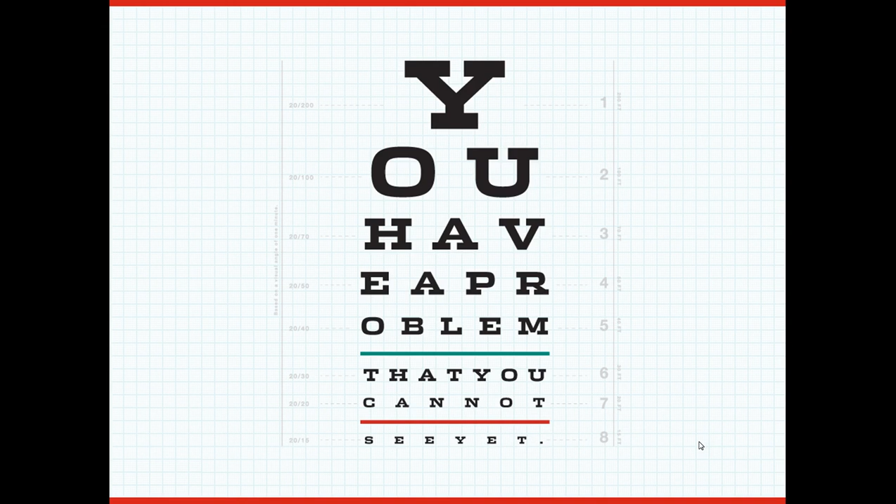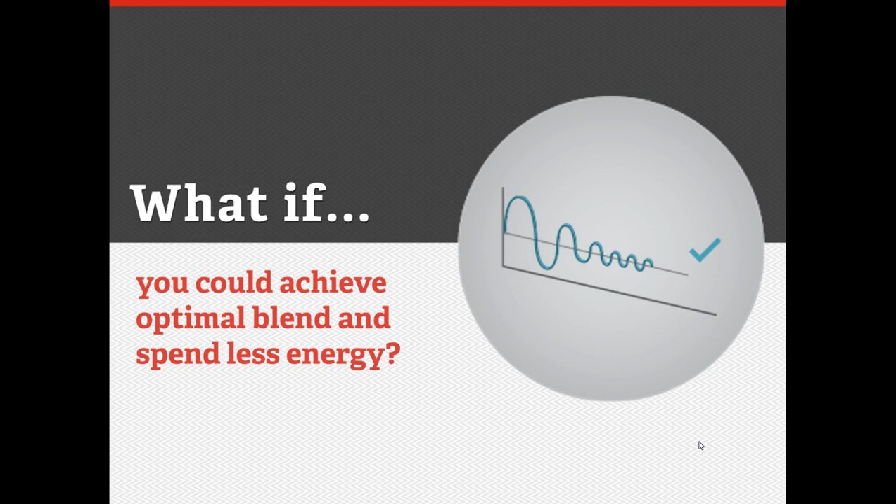Hi, I'm here today to talk to you about a problem you may not even know you have. Let me start by asking you a few questions. What if you could make more saleable paper? What if your machines ran more efficiently and lasted longer? What if you could achieve an optimal blend and spend less energy?

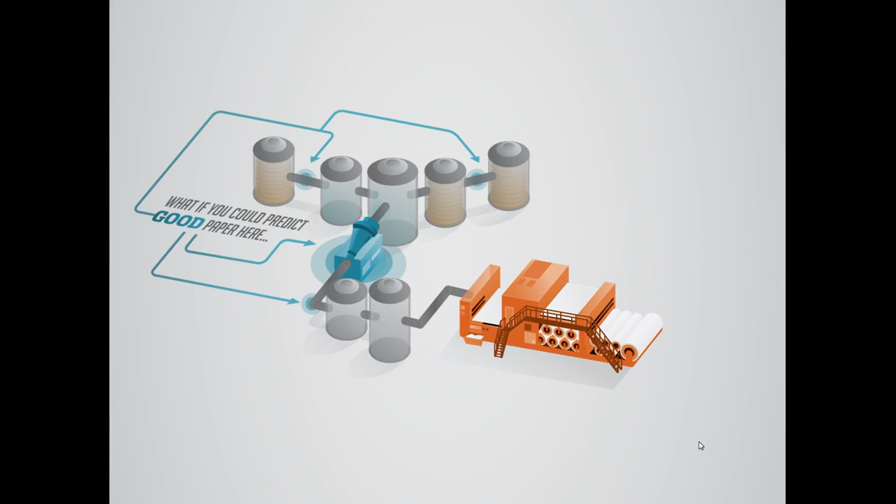Let me put this a little bit more simply. What if you could predict good paper here instead of making bad paper here? Well, with the TECO Drainac, you can. The Drainac is the only Freeness analyzer available today that will help you visualize, understand, and execute without wasted time or wasted money. Sounds pretty good, right?

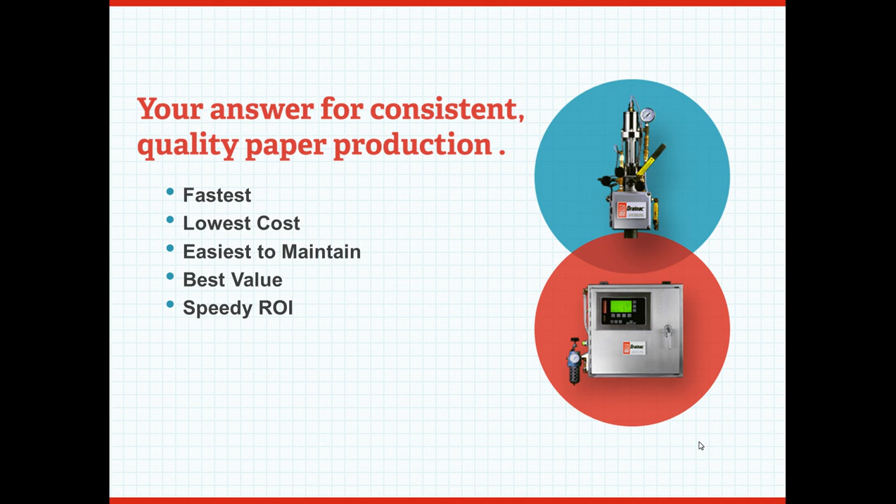The Drainac is the answer to your pain. It's the fastest, lowest cost, and most pain-free device of its kind available in the world today, and frankly, it's awesome. With this simple, low-cost instrument, you will revolutionize your process and realize a return on your investment so quickly, you'll wonder why you didn't make this decision years ago.

So, what's your freeness? Do you know? More importantly, do you know what impact variable freeness has on your process each and every day? Put another way, do you know how much variable freeness is actually costing you? We asked some of our customers what their life was like before measuring freeness with Drainac, and this is what they had to say.

It's a lot like driving down the freeway without a speedometer. Would you try that? If you're making something out of spec, you're inherently wasting energy. I'm sure that you can relate to that. We operate on a simple principle. If you can see something, you can manage it. That's the visualize, understand, and execute we started with earlier.

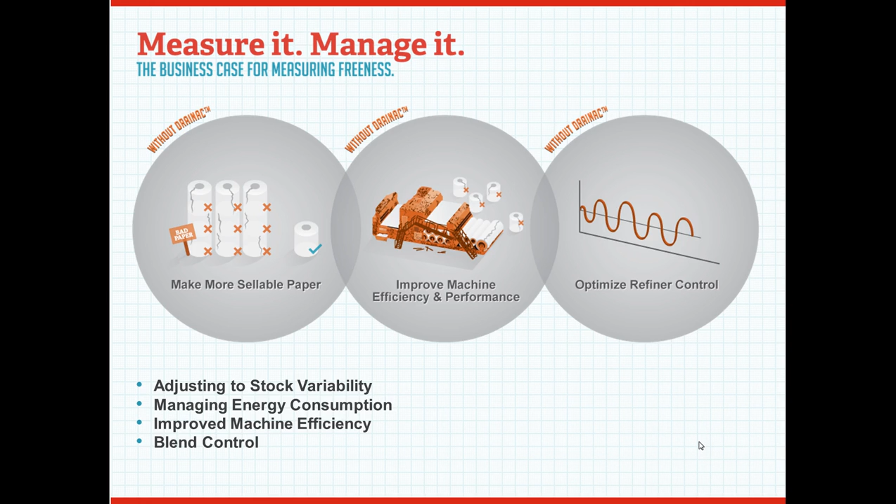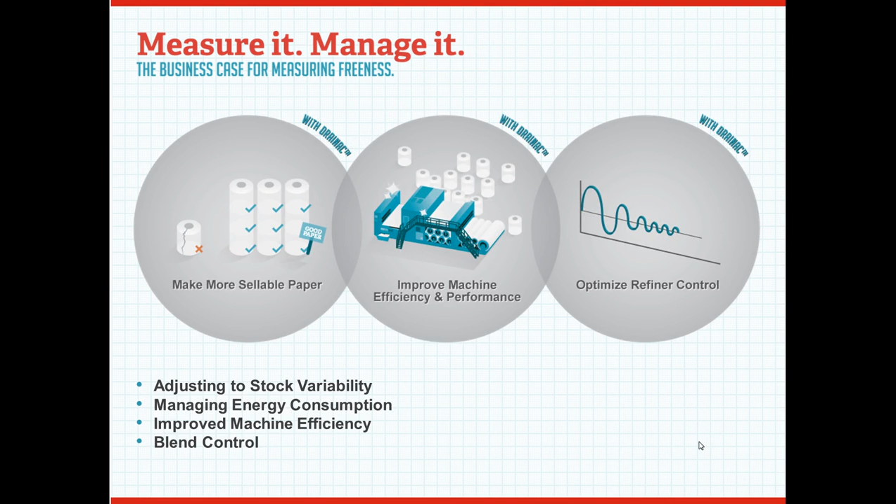The Drainac will help you make more saleable paper, improve machine efficiency and performance, and help you optimize the energy you're putting into your stock. So, I'd like you to ask yourself this question. What impact would measuring freeness have on your operation?

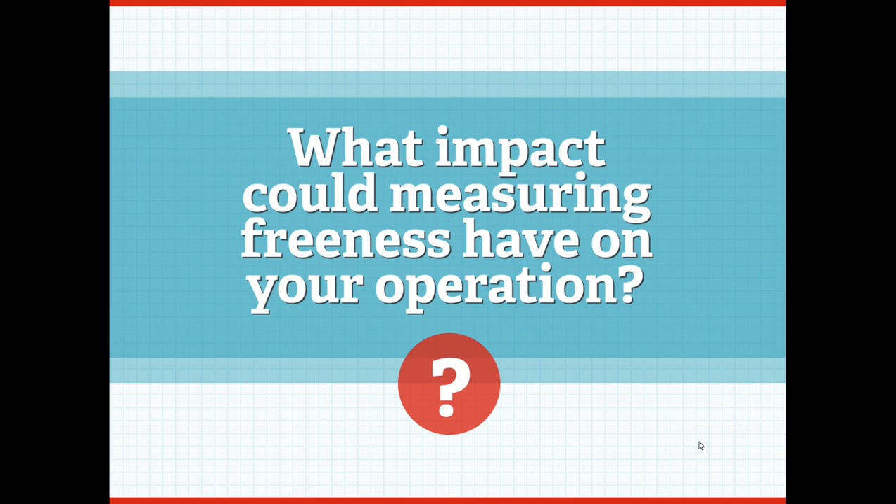Okay, so now you've heard the pitch, let's talk about the details. Drainac has many applications in facilities like yours. For example, some people use it to monitor freeness and perhaps close the loop on refiner control. Others use it for enhancing machine runnability and managing pulp blends. The facilities required for Drainac are pretty straightforward.

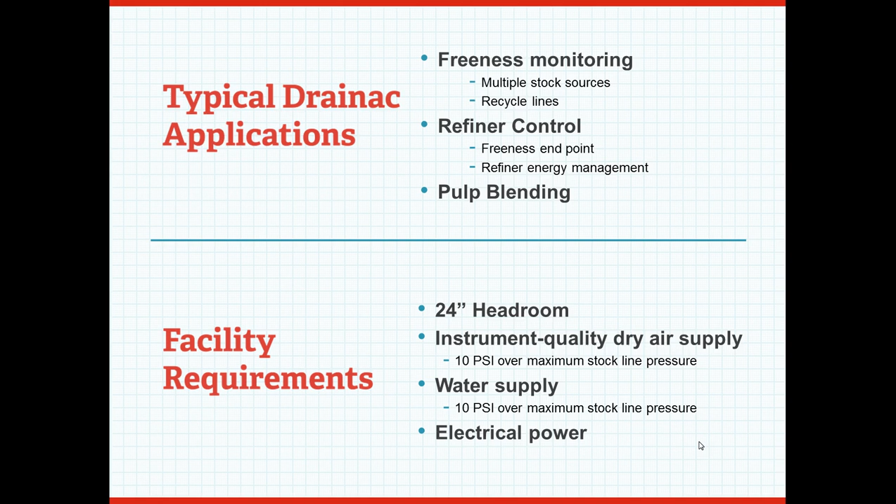You need a couple of feet of headroom for servicing the instrument. You also need a source of instrument quality dry air with a minimum pressure of at least 10 psi above maximum stock line pressure at all times. You'll need a source of filtered water, again at 10 psi above maximum stock line pressure. And of course you'll need a source of power. So let's take a closer look at the Drainac system.

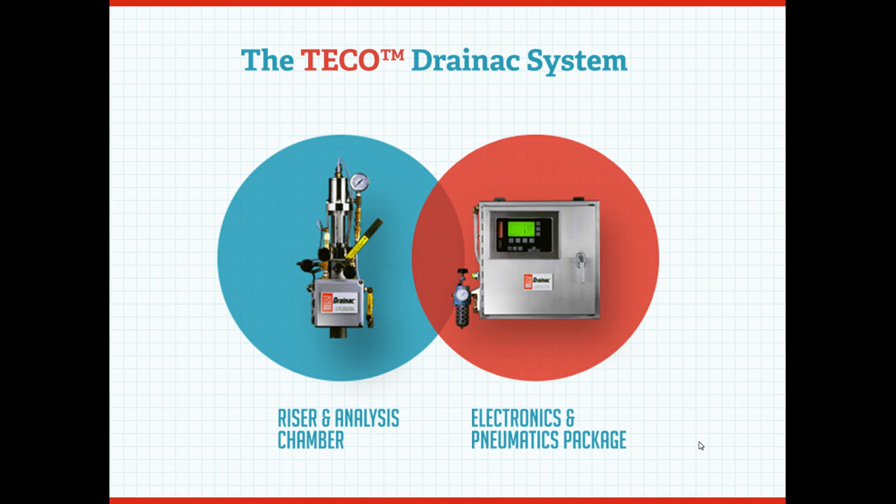There are two components to a Drainac, the analysis riser and the electronics enclosure. This is the analysis riser. It's the component that samples your stock and performs the freeness analyses. It's available in a variety of different configurations depending on your application. Typically, the riser is welded into a stock line, but it can also be mounted on an open chest or weir or on the side of a hydropulper.

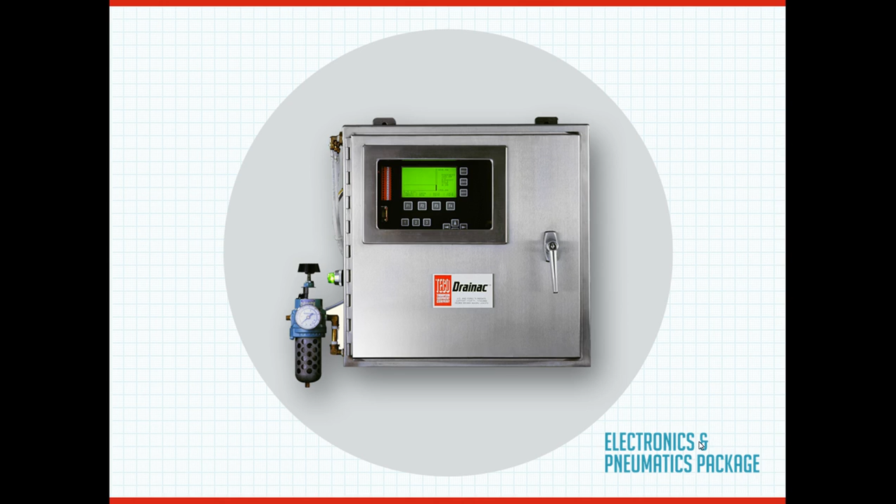This is the Drainac control enclosure. It houses the various electronics and pneumatic packages. So, how does this system work?

Unlike other analyzers, Drainac doesn't try to automate the TAPPI T227 CSF methodology. Instead, we use a proprietary technique that allows us to complete an analysis in as little as 12 seconds. We start by creating a pressure differential in the analysis chamber, which forces stock up into the riser. That stock hits a screen, which forms a fiber pad, and then only filtrate enters the analysis chamber. We measure the amount of time it takes that filtrate to fill a specific volume.

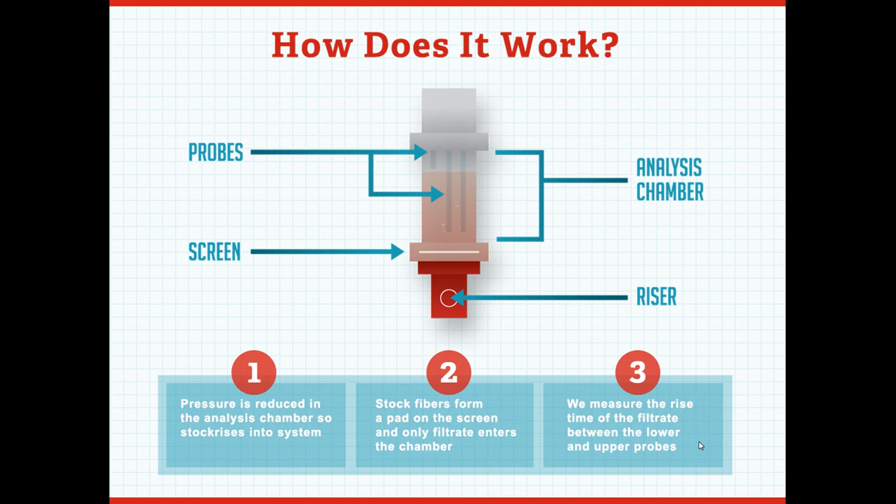It's a simple process, and this is what one customer had to say about the Drainac. With the Drainac, you're seeing the actual freeness while the paper is being built, and it helps you act in a more proactive, not reactive mode. This simple technology allows us to make quick decisions about refiner changes, better controlling the end product.

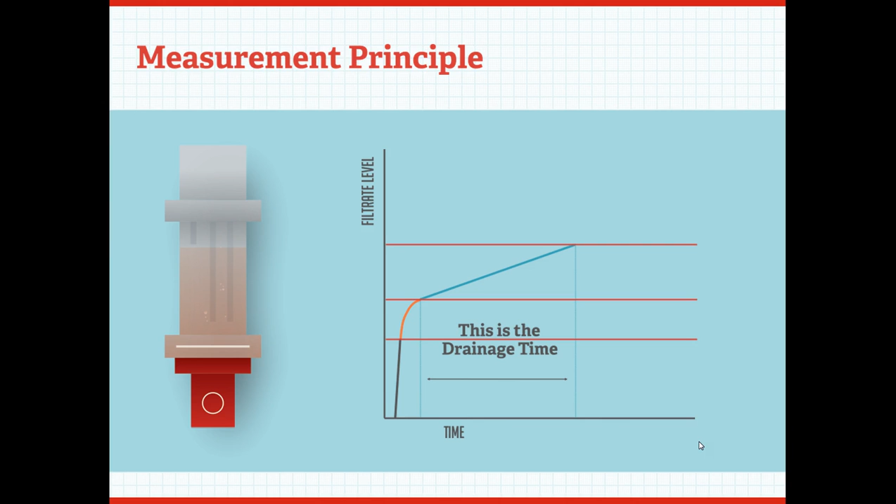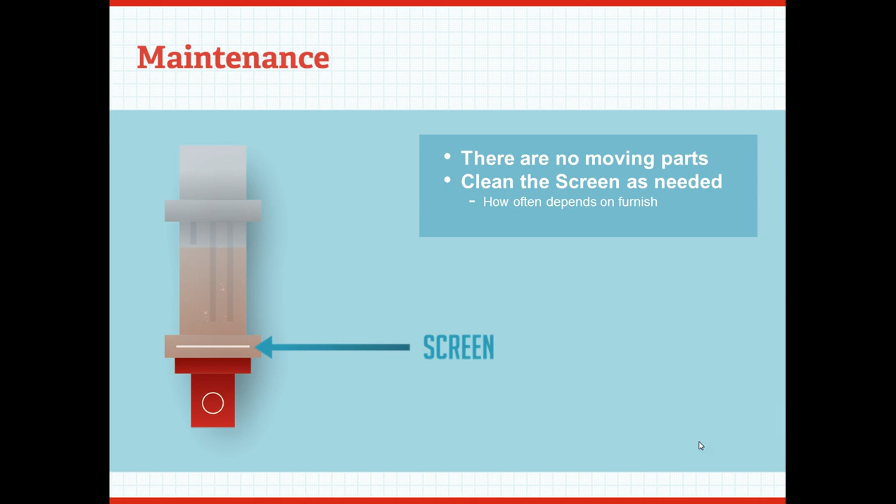The next question most people have is, what does it take to keep this instrument going? Well, let's talk about maintenance. Unlike our competitors, there are no moving parts to the Drainac, so it's very easy to maintain. First, you'll need to keep it clean, which mostly means keeping the main screen and the analysis probes clean and free of debris. How often you'll need to do this will depend on your stock, but most customers typically clean their systems 2 to 3 times a week. We've posted videos on YouTube which illustrate how to do this.

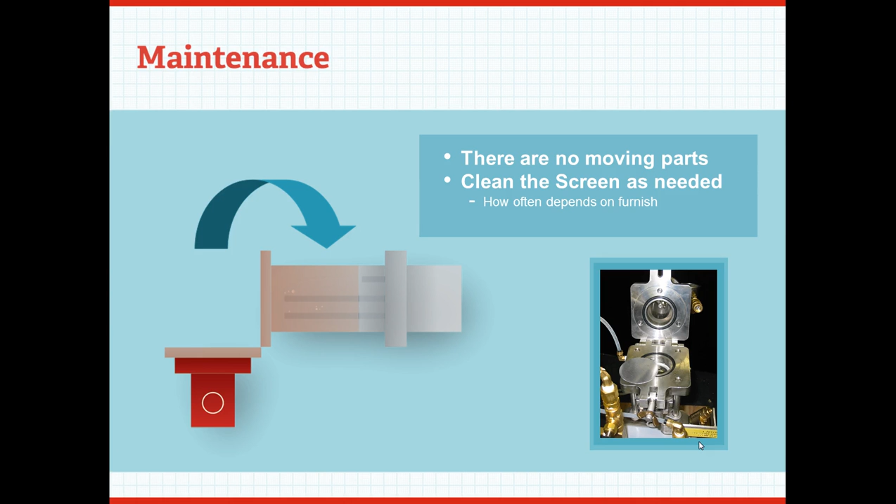About once a year, you'll need to replace certain consumables in the system. We've put together a recommended annual service spare parts kit and a service schedule, which makes this pretty straightforward. Your E&I staff will be able to do this without any special training required.

Now, the Drainac isn't the only way to measure freeness out there, but it frankly blows the alternatives out of the water. There's lab testing, but as you already know, that's slow and highly variable. You've got TAPPI T227 robots, but they're also slow, and they're very expensive. And because they're robots, they're complicated, and that means that they're expensive to maintain. Of course, you could skip testing altogether, but that's not good. If you can't see it, you can't control it. Drainac is the only device that will allow you to visualize, understand, and execute without wasted money or wasted time.

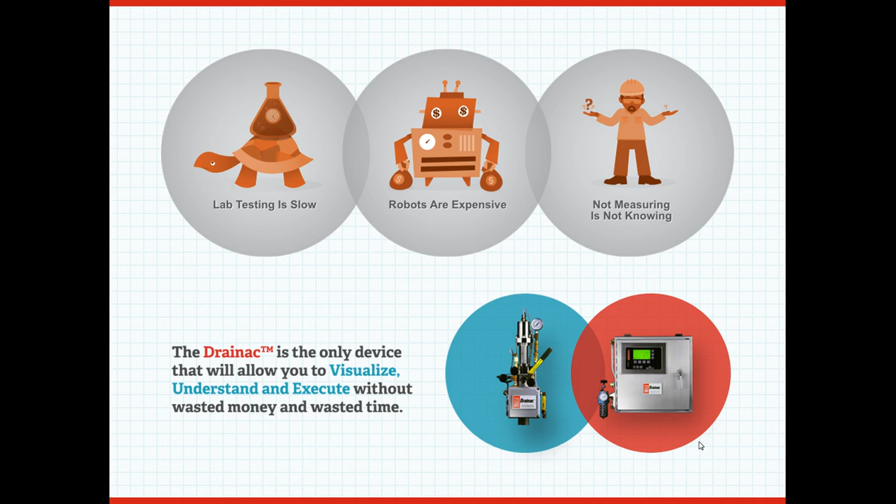Now, here's my favorite quote from a customer. The Drainac has allowed us to be proactive in measuring our freeness, which has made us more productive. We no longer have to slow down when we see a stock freeness change coming. We just adjust our refiners. It paid for itself in a month.

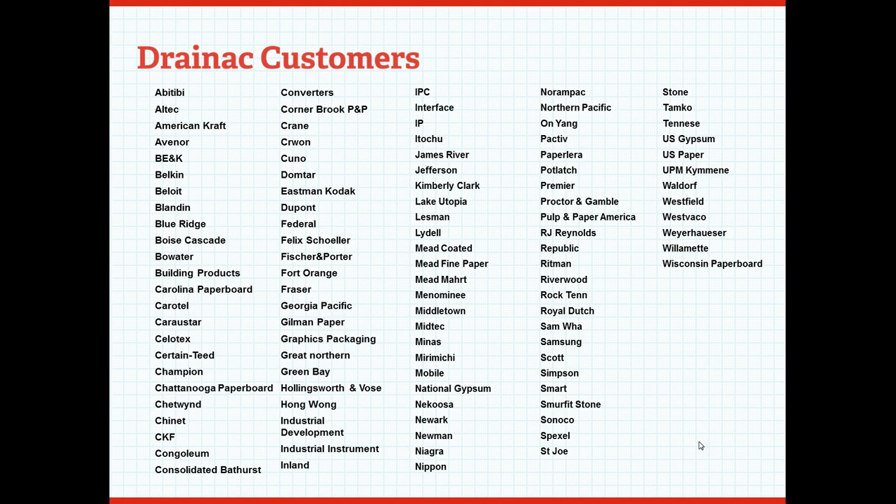So, let's wrap this up. The Drainac is simple, and really, so is the choice. Visualize, understand, execute. See the problem, understand it, and then you can plan a solution, all with Drainac.